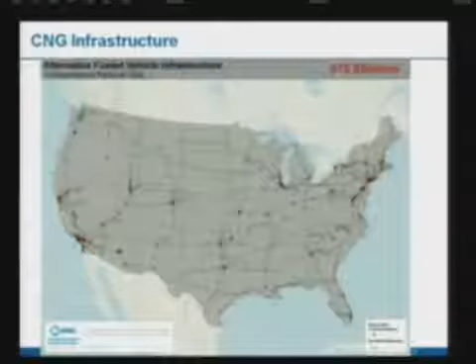This is a bit difficult to see, but here's a map of the compressed natural gas infrastructure out there. They have 870 stations, and most of them have a fleet based around them, so they can be kind of self-sustaining. They're starting to cluster together so fleets can go from one station to another, forming various corridors, like you can see in California and up in the New York area.

As far as the refueling infrastructure goes, the major cost drivers are based on how many compressors you need—that's the most expensive part of the refueling infrastructure. Your compression requirements are driven by two things: how much fuel you're running through the station on a regular basis, and how quickly you need that fuel pushed out.

If you need a lot of fuel but not very quickly, you can compress it and then store it, having it available as vehicles come in. But if you need it really quickly, you need a lot of compression capacity, which is very expensive.

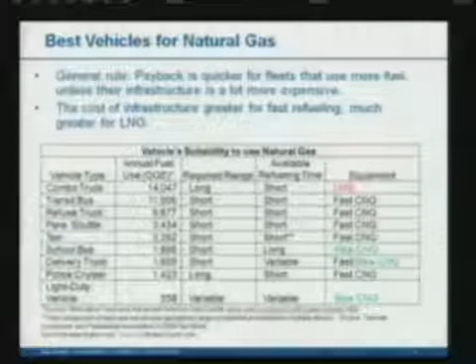And then you want to look at the available refueling time. If they're a fleet that all comes into the station at once, it has a long refuel or a short refueling time, which makes the stations more expensive. So those two columns dictate what equipment you're looking at. For the combo truck, you probably need liquefied natural gas, which is more expensive. For these next four, you're fine with a fast CNG station. Then when you get down into the school buses, which have a long down period, you can use a slow CNG station, which is a lot less expensive and more cost effective.

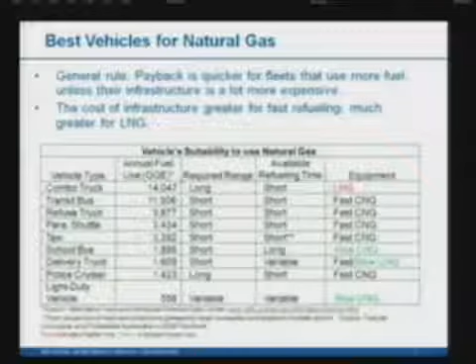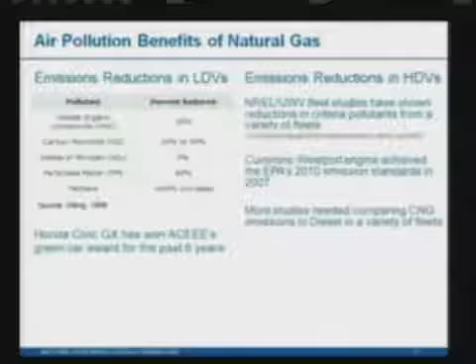Just as diesel vehicles have been striving to meet the 2010 emissions standards, Cummins Westport had an engine that had already met the 2010 emissions standards back in 2007. But we need more studies comparing the various fleets' emissions with diesel emissions as we come closer to 2010.

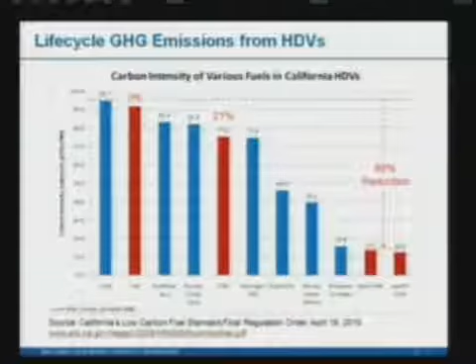Here's how greenhouse gas emissions go. I like that the California Air Resources Board has done a pretty good analysis of the life cycle greenhouse gas emissions for their low carbon fuel standards. You can see compressed natural gas reduces emissions 27% below low sulfur diesel. LNG doesn't do quite as well on their rating, partially because they assume a 10% efficiency reduction, which I'm not necessarily in agreement with. But there is an 86% reduction if you look at landfill natural gas.

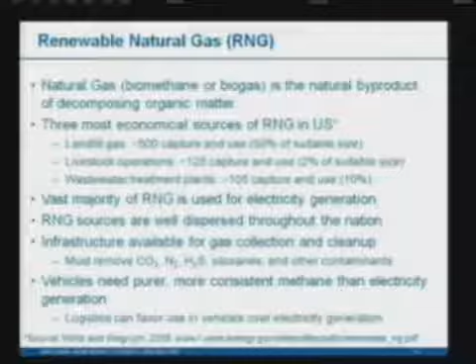The last thing I want to mention is renewable natural gas, also called biomethane or biogas. It comes primarily from landfills, from livestock operations, and from wastewater treatment plants. The vast majority of it is used for electricity generation right now, and an advantage of this energy source is that they're well dispersed throughout the nation, and we have the technology right now to clean it up to be able to use it in vehicles. And I will wrap it up with that.

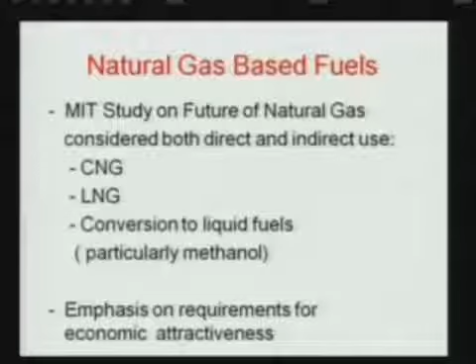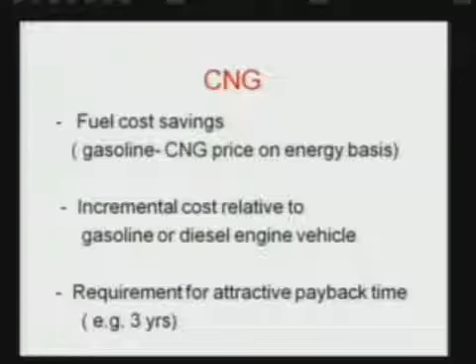Callie's talked about the economic issues involved in determining where CNG is promising as a transportation fuel. As he mentioned, you have to weigh the fuel cost savings versus the incremental cost of the vehicle relative to gasoline or diesel engine vehicles. And our view was, based on previous purchasing and use trends, that in general you would want a payback time of around 3 years for most buyers to purchase an alternative fuel vehicle.

So given that frame of reference, we made an assessment of the potential impact with particular emphasis on the near term, and by near term I mean the next couple of decades. And our conclusion is very similar to what you heard earlier. The greatest potential is for high mileage per year vehicle market segments because there the fuel savings is sufficient to pay back for the higher incremental cost. The most favorable segment from our point of view was short-range heavy-duty vehicles, and then after that high-mileage light-duty vehicles, generally fleet vehicles.

We made an estimate of the potential impact that these market segments could have on security and greenhouse gas goals, assuming 100% penetration. So assuming that you could get 100% penetration of these market segments, we concluded that you could replace a little over 1 million barrels of oil a day, which is equivalent to using around 2.5 TCF per year of natural gas.

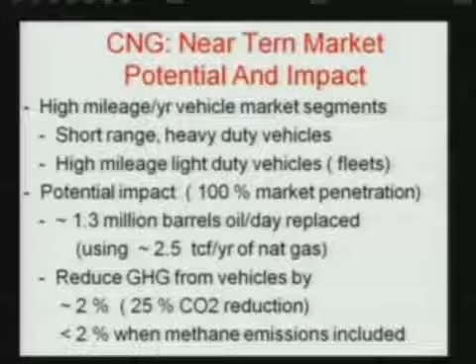Now, there is another factor that needs to be taken into account, and that's the methane emissions from the production, processing, transmission, and use of natural gas. And the EPA has recently increased its estimate of methane emissions from natural gas systems. And when you take that into account from a systems point of view, it can have a significant impact on the greenhouse gas benefits from all natural gas-based fuels. So in this case, the greenhouse gas benefit would be less than 2%.

Now, what about LNG for long-haul trucks? LNG has the advantage, as Callie mentioned, of having a high energy density and is thus suitable for long-haul applications. It does face a number of challenges. One is the high incremental cost. Even with short payback time, high incremental cost can be a concern for purchasers of trucks.

There's also the challenge of the operational limitations of using a super cold fuel. This fuel is at minus 162 degrees C. It has to be stored in a special thermos bottle, and you can only keep it at the cold temperature for a limited period of time. It has to be used in less than a week. And there is concern about the predictability of the thermal containment of the fuel.

Another challenge is the infrastructure requirement. It's expensive, and the potential users, the American Trucking Association, have expressed concern as to whether you would have a competitive fueling structure for their truckers if the trucks were to be used on the highway and have to use filling stations on highways. So this assurance of price competition between fuel suppliers is a practical

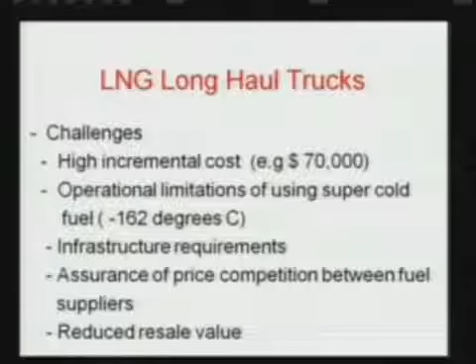consideration of some significance. Another challenge is the possibility of a reduced resale value for LNG trucks, because a significant number of long-haul trucks are sold internationally after they're used. And then the question arises, what would be their resale value if the country to which they're sold does not have an LNG

infrastructure? Now, these challenges that I mentioned can be mitigated if the LNG trucks are used for long-haul applications between hubs. There, the refueling would be done by the facilities owned by the companies, and the drivers would have certainty as to what the fueling availability is. The trucks can be used in a very predictable way, and so this looks to have significantly more potential than on-highway use. And this could be a modest but significant market.

And again, just to get a frame of reference, assuming 100% penetration of this market segment, oil consumption could be reduced by around 0.4 million barrels a day, corresponding to the use of 0.8 TCF per year of natural gas. It's difficult to estimate the greenhouse gas emission benefit because it depends very much on the efficiency that's assumed for liquefaction. But a representative number is on the order of 10 to 15% greenhouse gas reduction per truck.

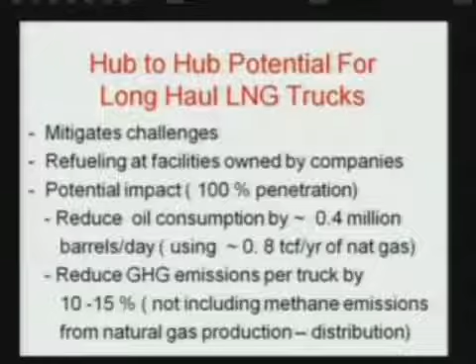Now, this, again, does not include the methane emissions from natural gas production, processing, transmission, and distribution. And as I mentioned earlier, this number has gone up, and so this can have a significant impact on the degree of greenhouse gas reductions.

Now, let me turn to conversion of natural gas into a liquid fuel. And there's significant motivation for this. If you could convert natural gas into an economically attractive liquid fuel that you could use like gasoline or diesel, your barriers provided by high incremental cost and the need for a completely new infrastructure would be removed. Natural gas conversion into liquid fuels has been done for a long time. The uses, though, have not been for transportation. It's been mainly for chemical production.

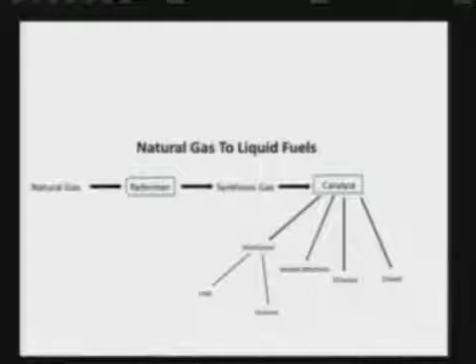And the way it works is the natural gas goes into a unit called a reformer. It produces what's called a synthesis gas, which is hydrogen and CO. That synthesis gas is converted by a catalyst to various types of liquid fuels. And you have a wide range of fuels you can produce, going all the way from diesel to ethanol, mixed alcohols, and then the smallest molecule you can produce is methanol. And methanol itself can be used as a feedstock for producing gasoline and DME, dimethyl ether, which is a clean burning fuel for diesel vehicles.

Now, of all these liquid fuels, methanol is the fuel that's best established. It's made in large quantities. 13 billion gallons are produced per year. It's used for the chemical industry. And it's the one that's made most efficiently. It's about 67% efficient in its conversion.

Now, if you were to take the natural gas in the U.S. and deploy the current technology, it would be possible to produce methanol at a cost of around $1.30 per gasoline gallon equivalent. That's taking natural gas at $4 per million BTU. So that's essentially $1 per gallon less than gasoline on an energy basis. And even if the natural gas price were to go up to $6 a million BTU, methanol could be produced at a significantly lower cost than gasoline is produced now.

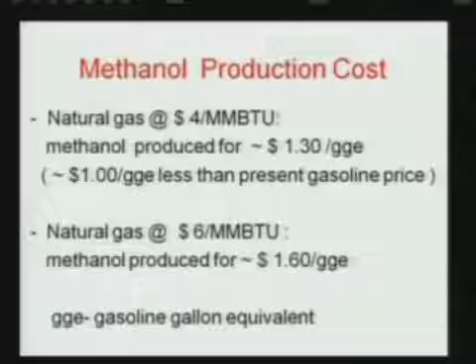Gasoline right now is produced at a cost of around $2.30 per gasoline gallon equivalent. So this is a very important aspect, that it's possible to produce a liquid fuel that could replace gasoline and diesel that actually costs less.

Now, there are two ways that methanol can be used. One is in light-duty vehicles, in flex fuel vehicles, which are similar to the ethanol gasoline flex fuel vehicles we have now, of which there are around 6 million on the road in the U.S. The additional cost to a vehicle that has the ethanol gasoline capability would be on the order of $100 to $200. So the incremental cost would be minimal. And in addition, the driver would potentially have a fuel cost saving. Now, there is legislation being considered to mandate that light-duty vehicles be capable of operating on ethanol, methanol, and gasoline.

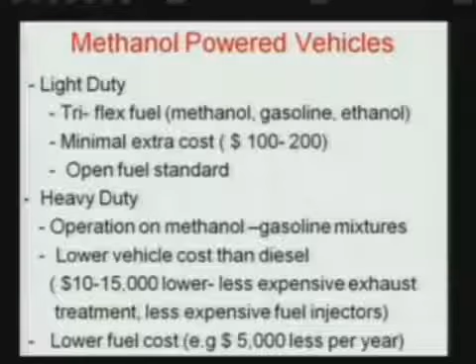The other option is a heavy-duty vehicle, where the vehicle could be operated on methanol and gasoline mixtures, flex fuel, and there would be two economic benefits. One is the vehicle cost would in fact be lower than diesel, not higher, and the reason is that these vehicles would use spark ignition engines, which have low-cost exhaust treatment systems and low-cost fuel injectors. So there could be a $10,000 to $15,000 saving, and there could also be a lower fuel cost saving. So there's significant potential economic benefit.

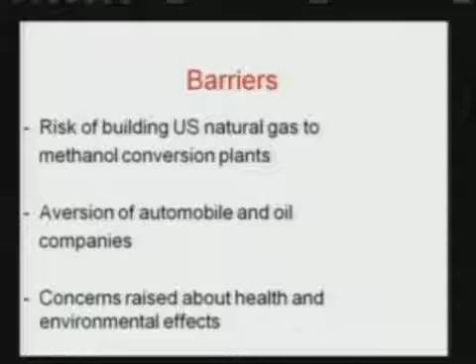There are barriers, the risk in building natural gas to methanol plants. Another barrier is there are not too many people who like this fuel. The oil and automobile companies are not enthusiastic about it, and concerns have been raised about health and environmental effects.

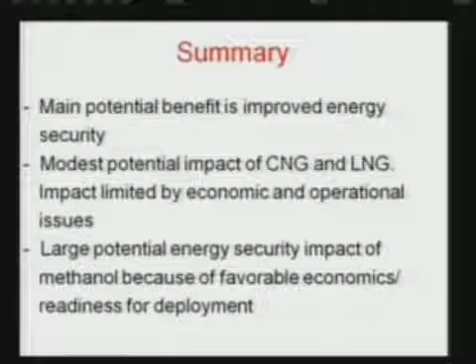So to sum up, our conclusion is the main benefit from natural gas-based fuels is improved energy security, not a greenhouse gas benefit. There's a modest potential impact of CNG and LNG in terms of reducing our oil use, and this impact is limited by economic and operational issues. With regard to methanol, there is a large potential energy security impact because of its favorable economics and readiness for deployment. However, as I mentioned, there are significant barriers to its deployment. Thank you.

Thank you very much, Dan. And we're going to switch gears a little bit, but we're going to come back to all these issues both in our panel discussion and when we get to Stephen. And Dana Aunkst from the Pennsylvania Department of Environmental Protection got slipped in just before we started, so I didn't get to plug him for his bio information, but he's held a couple of different titles because we've changed it a few times on the program, and I guess now you're actually the acting director of DEP. So why don't you maybe provide us a little background and talk about something that's gotten a lot of hype, water resource issues and shale gas development and fracking and whatnot. And I was really fortunate to find Dana, and really thank you for coming down to try and shed a little light on what's been a very emotional issue for some folks.

Thank you. Thanks very much, Jan. Yes, on Monday I started a new gig, so I am currently the acting deputy secretary for field operations for the Department of Environmental Protection in Pennsylvania. Field operations is essentially what it says. It's out and doing all programs in the field offices. So I'm having to get up to speed very quickly.

But as most of you probably are aware, one of the big potential opportunities for new natural gas development in the country is shale gas, and we'll hear more detail on that next. But one of the challenges that it poses to Pennsylvania is we have what's called the Marcellus Shale Formation that underlays about 2/3 of our state. It is a huge economic opportunity for the Commonwealth, because most of this geologic formation underlies areas that have been, over the last 25 to 30 years, hit particularly hard by the move to the Sun Belt and are otherwise known as the Rust Belt. So a lot of these older towns and cities in north central, northwest, and southwestern Pennsylvania see this as a very, very huge opportunity, as does the Commonwealth as a whole.

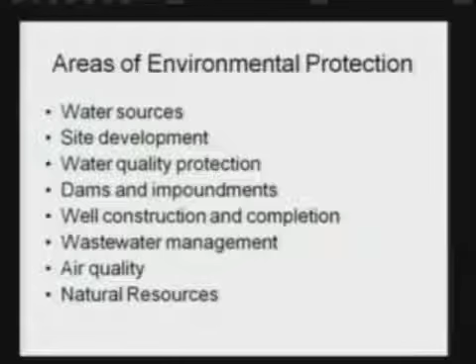And when we first became aware that this was going to be such a huge play, a huge economic opportunity, the first thing we had to do was find out how many areas of environmental protection this whole operation, the development of these wells and the infrastructure necessary to deliver the gas to market, was going to affect. And this gives you an idea of all of the areas of environmental protection that we currently interact with regard to this play. And I'll go through each one of these.

First, water sources. Each one of these wells, when they're drilled and hydraulically fractured, because of the technique, the depth, and the horizontal drilling, can take up to 5 million gallons of water to hydraulically fracture. Generally, we're told it varies from 3 million to 5 million, but it can be up to 5 million. And when the industry first moved into Pennsylvania, we are a very water-rich state. We have the second most miles of streams of any state in the country, Alaska being first. 86,000 miles of streams in Pennsylvania.

It was looked at as an abundant source, and we were never going to have to worry about the quantity available. Unfortunately, they came into Pennsylvania in the springtime when the snow melts and it rains, and so the streams that they saw flowing very healthily in the springtime don't always flow that way in the summertime.

Much of the water, when it's used in a hydraulic fracturing operation, is what we call consumptively lost, meaning it's contaminated to a point where it has to be disposed. In a lot of cases, the common practice was deep well underground injection control wells. So it's consumptively lost. How much water will be needed? We need to get projections of that because we need to figure out whether or not we have that available flow in our streams and lakes.

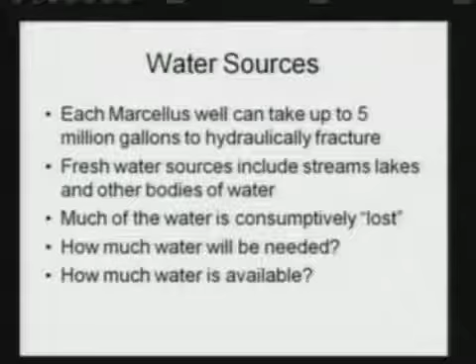The good news is we're starting to get data back after a couple years in this business, and we're finding out in the Susquehanna River Basin, which has a separate federal compact, the Susquehanna River Basin Commission, that oversees water consumptive loss, that the daily consumption is no greater than one of our power plants that essentially evaporates steam through cooling towers. So on the grand scheme, it's not as big an issue as it may have originally been thought. But we've only been at this a couple of years, and the industry hasn't completely ramped up yet.

So water sources was an issue. Site development: these pads where they construct the wells, generally a good-sized pad, maybe 6 to 8 acres, and then they'll drill multiple wells off these pads. So we have these well pads being constructed in the northern part of the state, the north-central, northwestern part of the state, that are primarily forest or even a lot in agriculture as well.

So we have concerns about erosion and sediment coming off these construction sites, and then post-construction stormwater. What type of post-construction site characteristics are going to be left on the landscape, and are you increasing stormwater runoff there by increasing erosion in your streams as well?

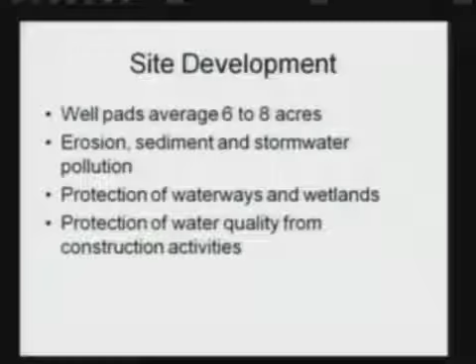We also had to consider the protection of our waterways and our wetlands. A lot of wetlands, given the number of streams we have, and we don't want construction on these well sites impacting or destroying wetlands. So that's another big issue we had to get our hands around.

And then finally, protection of the water quality. Construction of roads, pipeline facilities, and the well pads themselves has the potential to impact the stream in terms of erosion and sediment, but we have stream crossings where the roads have to cross streams, pipes have to cross streams, so we're very concerned about that. Site development issues were also a big concern for us.

Well construction and completion, and what we consider completion includes what everyone knows as hydraulic fracturing, or for short, fracking. So in constructing the well, we have to make sure we have proper regulation in place requiring well casing that meets certain standards to prevent gas migration.

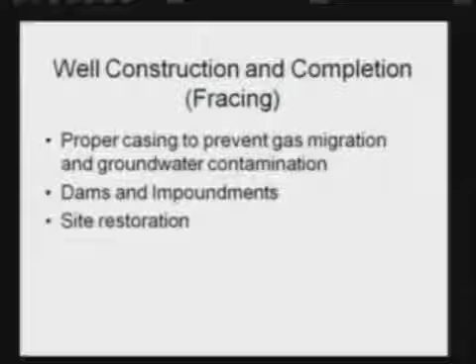One of the issues we're chasing right now in some areas: Pennsylvania's been an oil and gas state for 135 years plus. The first oil well in the country was outside of Oil City, near Titusville. We've had natural gas in our energy infrastructure for many years. We have naturally occurring natural gas in shallow formations, and a lot of times when these wells get started, they hit these shallow pockets unknowingly, and we end up with gas migration. So proper drilling, construction, and casing requirements needed to be developed, and we recently enacted new regulations in that area.

A lot of these activities involve the construction of dams or large impoundments, because what the industry has gone to now, over concern with the amount of available water, is to recycle and reuse a lot of the water.

They've figured out a way to recycle and reuse water so they don't have to use as much fresh water. But that involves construction of large impoundments where they manage these flows, fresh water in, hydraulic flowback water in, to mix for another frac job on the same well pad for a different well. So we had to get our arms around the construction of dams and impoundments.

And then finally, site restoration, and this gets back to post-construction stormwater, but it also gets back to issues related to deforestation, and I'll get into that a little bit later.

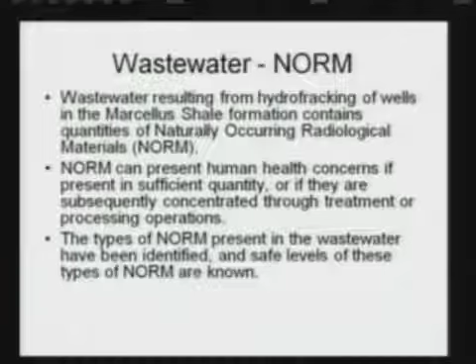So the wastewater, when it comes back out of the wells after the well's been fractured, can pick up quantities of this NORM. It can, at certain levels, present some health concerns, especially if it's subsequently concentrated through a treatment process, where this material is actually treated and the solids are dropped out. That can concentrate some of this NORM, and that's called TENORM, technically enhanced naturally occurring radioactive material. But nonetheless, it's naturally occurring.

And we have identified the types of NORM in this wastewater. We've done pretty extensive sampling on our own, and the industry has also provided us with a lot of data that has given us an idea what's in the wastewater and what levels these parameters are present.

We've determined right now there's no immediate hazard at these levels, but we're going to take precautionary controls. We're going to get out ahead of this. We're going to require monitoring of the wastewater. We're going to also accelerate the frequency at which downstream drinking water intakes may have to monitor their water, just to make sure, to be on the safe side, that what we're seeing now continues to be seen into the future.

The other parameter in the wastewater is total dissolved solids, and these can run very high. Again, this formation, being a shale, is an old seabed, so it's essentially loaded with salts. So when you fracture this material and put water in there to fracture it, it comes back as very, very strong salt water. So there are problems with the TDS.

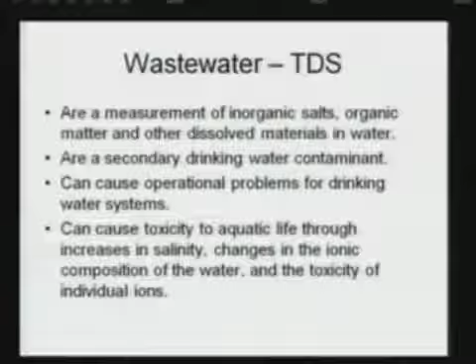They are a drinking water contaminant, albeit for what's considered secondary effects, meaning taste and odor, and they may discolor laundry or prevent your dishes from getting clean. But high TDS can also cause other operational problems at drinking water systems, such as the formation of disinfection byproducts, which some are known to be carcinogens, so we have to keep an eye on the TDS. And then finally, it can cause toxicity to aquatic life in streams if the TDS isn't managed properly.

We did an analysis that showed our rivers and streams had a very limited capacity to take additional TDS. There are a lot of legacy loads of TDS in our streams, many of which are affected by it, so we had to get out ahead of that issue as well. There was growing demand for the capacity of the streams, and we have a number of different industries in Pennsylvania, so we wanted to make sure we protected the economic development of all industries by not using up all the assimilative capacity, making it available to everyone.

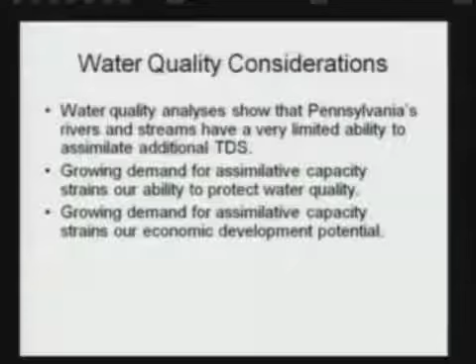We passed a new regulation last year that deals with TDS and requires this type of wastewater to be treated to a very stringent standard. Essentially, this wastewater has to meet the drinking water standard of 500 milligrams per liter before it's discharged to the stream. Now, air quality issues.

We did two studies, one in the northeast, one in the southwest part of Pennsylvania, in 2010. Both of those studies came back and found concentrations, as would be expected with the developing industry. They found concentrations of natural gas, and they found elevated methane levels in the ambient air.

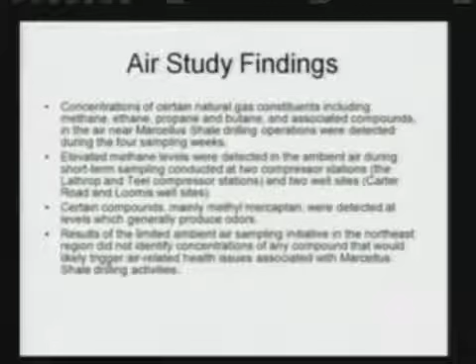But the conclusions were that they weren't levels that we needed to be concerned about yet. So that's the good news now, but again, we've got to try to stay out ahead of this. They found some other pollutants, but as I said, the good news is right now it's not something to be concerned about.

So in summary, those are the areas that this new industry touches on in Pennsylvania. Our department is addressing these as quickly and as well as we can, and we intend to continue to do so. Thanks.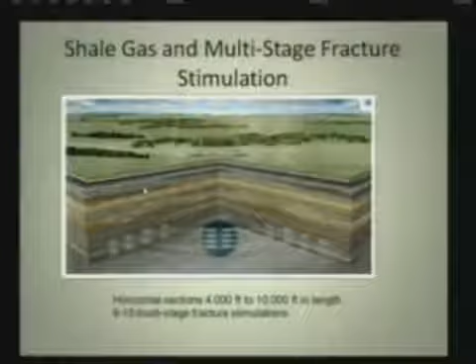What is new about shale gas? They've been drilling through shale gas formations for over a century. It's been known that they're the source of gas. They always bled gas; the cuttings that came to the surface showed that they were exuding some gas. It just wasn't recognized as a commercially producible formation. The first horizontal well was drilled in 1929, but the real commercial application of horizontal wells took off in the 1980s. Fracture stimulations have been performed since prior to 1950.

The Mitchell company started drilling vertical wells in the Barnett Shale in the 1980s. The application of horizontal wells started in the Barnett Shale in 2003, and within 2 or 3 years, many companies were competing for acreage in the area. It all of a sudden turned into the hottest play in the country.

This graph is from the EIA 2009 study. You can see that shale gas is the predominant source of growth in the overall natural gas production profile. They're currently producing about 24 TCF a year, and by 2035 that will be about 27 TCF a year, which is about a 10% growth over that 26-year time frame.

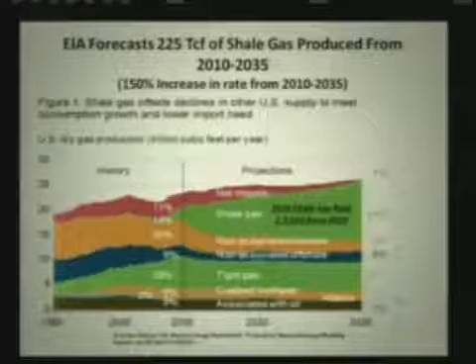Shale gas, on the other hand, is growing by 150%, and at the exit rate in that graph it's producing 45% of the overall gas. The amount of shale gas produced from 2010 to 2035 is about 225 TCF. That's a number to keep in mind, and I'll refer back to it a few times in the presentation.

Just some of the word slides. The Potential Gas Committee was developed out of, I think, the Colorado School of Mines. I don't know that much about it, but it's one of the better respected evaluations of natural gas resources in our future. It's updated about every 3 years. Their proved and probable estimate of natural gas is 441 TCF, with shale gas contributing about one-third of that.

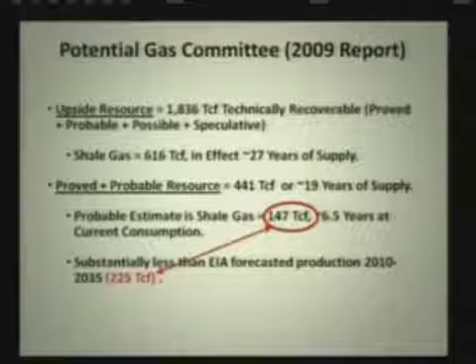That volume they estimated in 2009 is 147 TCF, which compares to about two-thirds of the 225 TCF that the EIA has in their forecast. That 2009 study had a dramatic increase in the amount of shale gas assumed, and it's very hard to see into the future, so the potential for these numbers to change in 5 or 10 years is quite substantial. That disconnect, I'm not sure, is necessarily significant.

This is a production profile or forecast of the overall shale gas contribution to natural gas supply, based on the individual plays. The reason I show this is to illustrate the impact of four key shale gas plays. The Barnett Shale is the oldest.

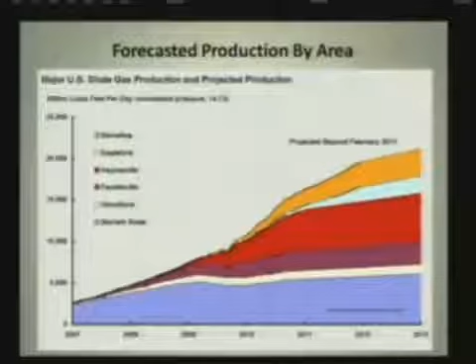The Barnett was developed with vertical wells in the 1990s, converting to horizontal wells in 2003, and with the improvement in gas prices after 2003 became the hottest shale gas play. Next in time frame is the Fayetteville in northern Arkansas, followed by the Haynesville, which is currently the most important source of growth in shale gas, potentially contributing about one-third of the overall shale gas profile. Then there's the Marcellus, which is currently rapidly growing, and because of its large areal extent has the potential to be a very important source.

This is collaborative work with Art Berman, looking at publicly available data. This public data has monthly production volumes for each of the wells, or many of the wells, in the plays, and they're searchable, so we can identify which production horizon they come from, when they were drilled, and who operates the wells. After looking at several thousand wells in the Barnett, Art and I estimate that the ultimate recovery of the wells is about 1.2 to 1.3 BCF per well, whereas most operator investor presentations support say 2 to 2.5 BCF.

In the Fayetteville, we found very similar results: 1.2 BCF versus the 2 to 2.5 BCF claimed. In the Haynesville, we're seeing 2.5 BCF average per well. It's much more problematic to estimate ultimate recovery there because there's less data, and the wellhead flowing pressures are changing, with the public data not providing much information on how those surface flowing pressures change. So there's certainly more uncertainty in that estimate. But we do see a core area of 4.6 to 4.8 BCF per well, and the main operator in that core reports 10 BCF per well.

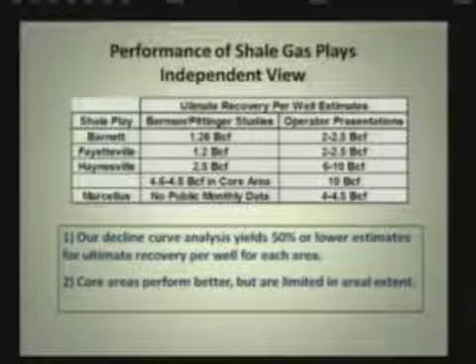For the Marcellus, unfortunately, the state does not require publication of monthly production data. They do provide cumulative production on a 6-month basis, and I'll show one graph on that. So we don't have particular conclusions on the Marcellus, but many operators support a 4 to 4.5 BCF per well estimate.

In summary, the two main points of the presentation are: our decline curve analysis tends to lead us to estimate the recovery of these wells at about 50% or lower than what is generally discussed in investor presentations. And, just as important, the core areas where wells are performing better are quite limited in extent—say 10 to 20% of the overall area of the plays.

So I just want to go through quickly each of the key plays we're talking about.

The Barnett data is substantial. We have 40, 50 months of data in some of the older wells, and we're seeing fairly established decline trends. This curve shows the group average curves, representing about 450 wells with fairly established decline trends. We're seeing a weighted average recovery of 1.2 to 1.3 BCF per well, based on the average including the database.

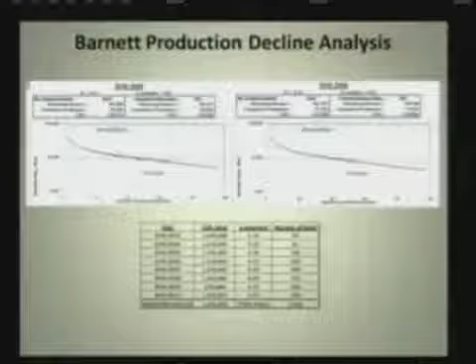That's 2,300 wells in that database. Fayetteville shows 1.2 BCF per well for 2,000 wells. Once again, there's a lot of data with fairly regular late-time trends where we've got 20 to 30 months of data following a fairly established pattern. So it leads us to be fairly confident in these two trends.

The Haynesville is much more difficult. It's a much higher pressure formation, actually initially at lithostatic pressure, which means the gas is holding the fractures open at these initial conditions. Because of this extremely high pressure, and these being deep formations, the initial rates are very, very high.

But the decline rates are also very, very high, and we don't have as much data for this trend. We also see very large flowing pressure and surface pressure changes, so it's much more challenging to evaluate. But our estimates are about 2.5 BCF per well overall, with a core area of about 4.6 to 4.8 BCF, roughly half of the operator claims.

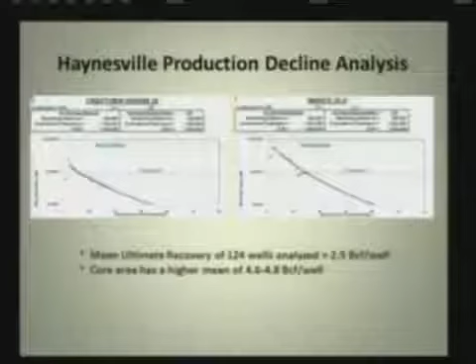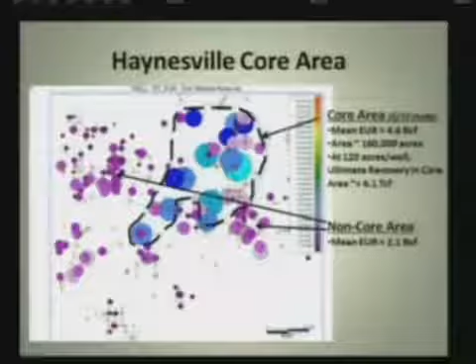Now if we take that 160,000 acres and assume an eventual development spacing between 80 acres per well and 160 acres per well, say 120 acre average spacing per well, that gives us 6.1 TCF out of the Haynesville core area. The Haynesville is about a third of the shale gas, and shale gas is expected in the EIA estimate to produce 225 TCF over that 25-year time frame.

So I think the extent of these core areas in these plays is very important.

Are these wells going to continually flatten and stabilize and produce over a 40, 50, 60-year time frame, or will they continue to decline at similar rates as now and have a well life of about 10 to 15 years? Based on our work observing the Barnett shale and Fayetteville wells, we think we are not going to see as much flattening as is assumed by the operators.

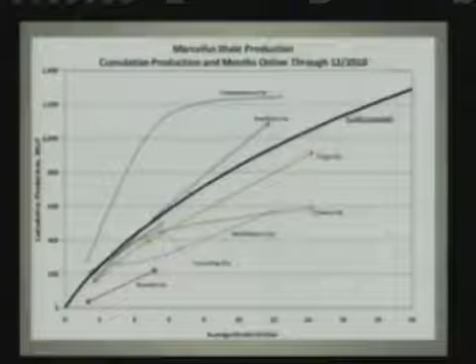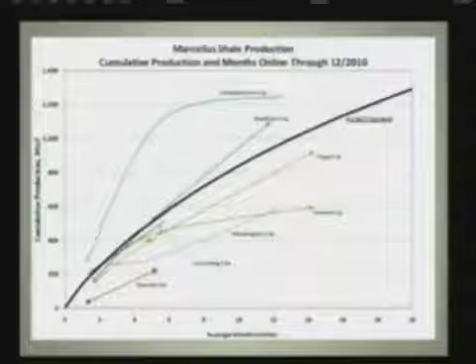Quickly, the data for the Marcellus play is in a different format, so it's hard to analyze like monthly production data. But we see a couple of counties outperforming. Susquehanna County is doing very well compared to the average 4.2 BCF type well supported by operators.

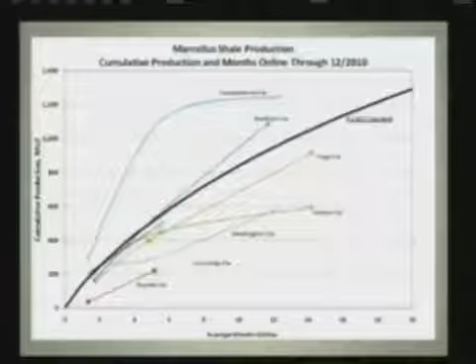Bradford County is also doing well. But there's a lot of activity in Washington and Greene County, and the data from those wells is underperforming the curve by a substantial fraction.

Typically, one well per 640 acres is needed to hold the acreage, and much of the recent drilling rate has been aimed at holding acreage.

The natural gas companies are also in a growth story, and I think they're selling their shares of stock more on the momentum of a growth story rather than the overall chance of commerciality of running their business.

The write-downs of the 5 key shale gas players totaled $37 billion in 2008 and 2009. Capital investment to drill these wells is typically about 150 to 300% of cash flow from these companies. So the result is you have natural gas selling at a historically low discount to oil, and there's a lot more activity drilling these wells than perhaps on a long-term basis can be justified.

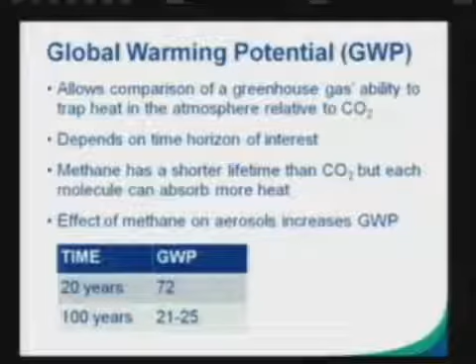This really matters because, broadly, if we put too much potent greenhouse gas in the atmosphere, we can lose the short-term battle because we are so heating up the atmosphere in the short term, even though we're on the trajectory to lower it later. So time matters. We can't just think about the 100-year global warming potential; we've got to think about the interim steps. So we're using 20 years as the context.

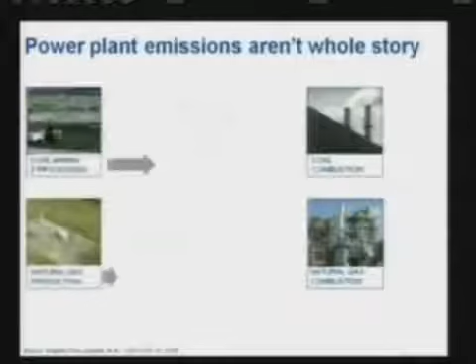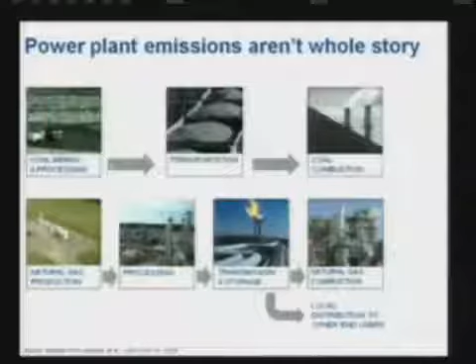I'm going to use a different comparison, coal combustion and natural gas combustion, because there's better data about that. We can think about the supply chain that Daniel referred to and the greenhouse gas emissions across that supply chain. As Daniel talked about, they looked at that in the MIT study. You can quantify that, and these are some estimates we have recently put together. Again, this is not the case before us, but it gives context, and the data is far stronger here.

But even in this case, we do not have good error estimates. We do not have uncertainties around those two numbers on the right, and that's really what we need, because with the uncertainties, those are actually overlapping numbers. We cannot differentiate between them. That doesn't mean they aren't different, but the data quality is not sufficient.

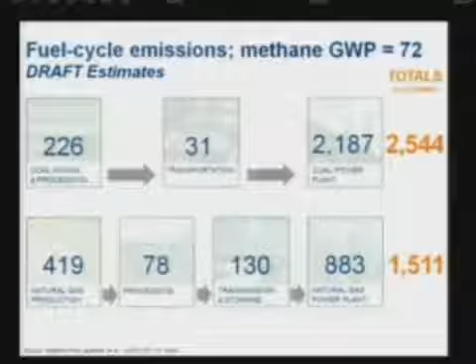And this is the theme, one of the key points that I want to bring out that's relevant to the issue before us today as well: we really are lacking in good quantitative data on natural gas leak rates throughout the processing, transportation, and use of natural gas. So that creates a lot of uncertainty in the global warming potential implications of using natural gas. And these numbers, by the way, are with a 20-year estimate.

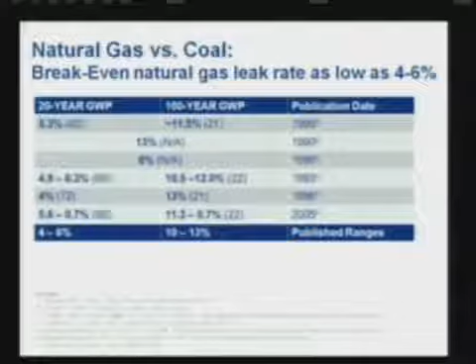So if we go and look at the literature, again, now comparing natural gas to coal, what we find is that the 20-year leak rate break-even point between those two fuels is between 4 and 6%. And the literature's got some fuzziness in it. There's even an issue in the literature now about what the appropriate global warming potential of 20 years is. There's some later data that suggests 72, which is the consensus right now, is probably too low. But we stuck with 72.

But what we care about here is if we do it to gasoline, and I should have put gasoline diesel here because it's the same, that number from 4 to 6 goes to 1 or 2%. So if you have a leak rate of 1 or 2% in the process of using it as a transportation fuel, you are going to be at the break-even point. And it's actually, in most cases, closer to the 1% than the 2%. But I put it as a range because I think that's a better representation of the uncertainty in the underlying analysis. But our data is not as strong as we'd like. There's really a lot of uncertainty here.

And if we look at the 100-year, it's 3 to 5%. Those are very low numbers because, as Daniel said, EPA has raised their estimate to 2 to 2.5% upstream leakage. So that means, based on the best available data, which still has a lot of uncertainty, there's a lot of opportunity for refining those numbers. There's also the possibility that these numbers could be underestimated. The last revision was doubling the estimate. There's some other data to suggest it might be higher than the 2 and 2.5%.

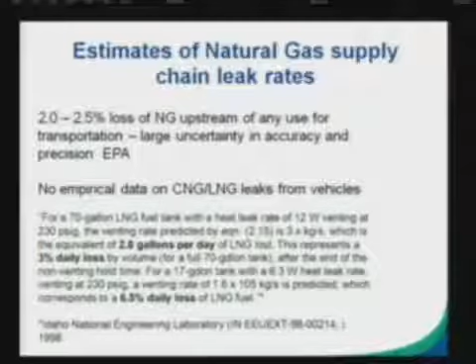So what that says, going back, is that in the 20-year time frame, a natural gas vehicle is a net increase of net radiative forcing, meaning it's a negative relative to how much impact it's having on the global climate. It's not neutral, as Daniel says, in the 20-year time frame, most likely, based on best available data. There's lots of uncertainty, and I'm stressing that carefully because we are pushing really hard. We've got to get better data to sort this out. We need more transparency with industry. We need to understand what the issues are. There is not good transparency across these data. And there are fights to even make it more transparent.

That does not even include the actual use in the transportation sector itself. So what are the leak rates in CNG and LNG vehicles? There may be some data out there. It's not very visible. The data that we can find is limited, and it suggests that those numbers are considerably higher. So if we go back again to the 100-year global warming potential, which is probably what Daniel was referring to, we're now talking about neutral. It's going to be worse based on the data that we currently have in the short term, possibly break even in the longer term, but the error bars on it are too large.

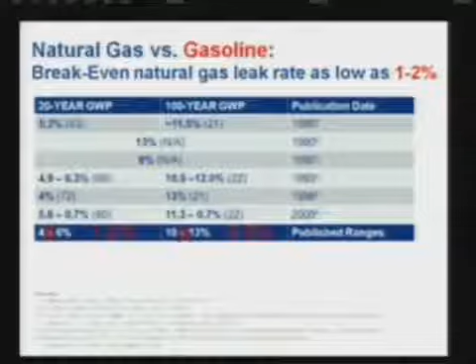We shouldn't be making public policy without better data and ensuring that we really get everyone working together, including industry, on all sides of this. Let's get the best data. Let's use the science to really answer this question, because right now there's too much uncertainty to really understand the implications. But the indications are, for a transportation fuel, based on the best data now, before we try and reduce the leak rates in the industry, we would actually be increasing net radiative forcing.

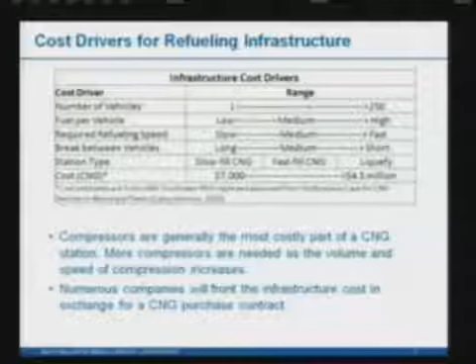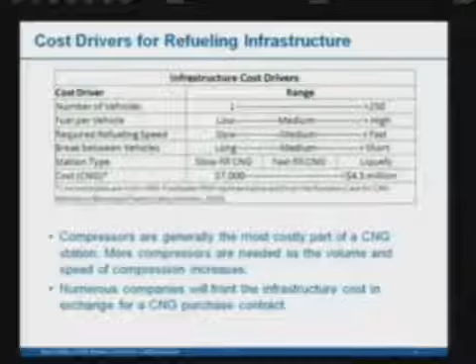And so these top two rows in the table dictate how much fuel gets pumped through the station: the number of vehicles refueling at the same station, and the amount of fuel per vehicle. And the next two, the required fueling speed and the break between vehicles, dictate how quickly you need to have that compressed natural gas available. So basically the quicker a vehicle needs to refuel, like if they're in a fleet that just doesn't have much time and has to get in and out really quick, that makes it more expensive. And if you have no breaks between the vehicles, such as an entire fleet of transit buses coming in after a day of transporting people, then you have to refuel many vehicles quickly, and it becomes more expensive.

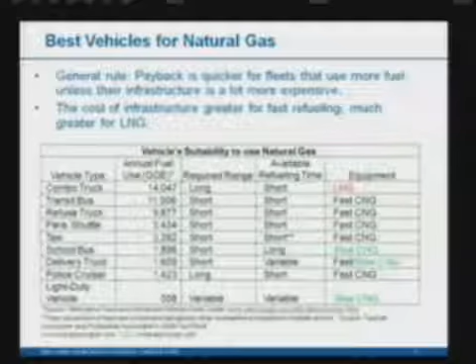And so if you sum up the past couple of slides and look for what fleets are particularly favorable to use natural gas, we start by looking at annual fuel use, because you're paying off the upfront infrastructure costs through fuel savings, by the amount that natural gas is cheaper than diesel. So the more fuel a vehicle uses, the quicker it'll pay off its infrastructure, and the more profitable it will be.

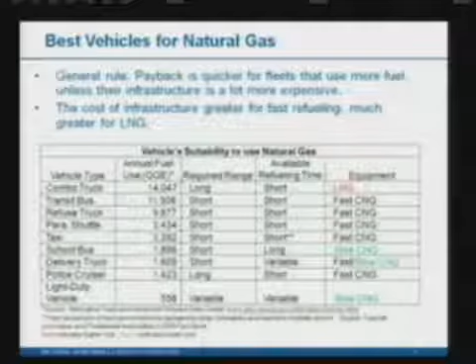You can see these vehicle types are listed from the ones that use the most fuel to the least. And the range determines basically how much fuel you need to put on the vehicle at once, if it has a long range.

Let me just walk through the overview of the presentation. We have Callie Johnson from the National Renewable Energy Laboratory, who's going to give us a broad view of the state of the market for natural gas vehicles, where the opportunities are, where the challenges are. We have Dr. Daniel Cohn from the Massachusetts Institute of Technology, who has done a lot of research on different transportation technologies, but was also the executive director of the Future of Natural Gas study that MIT did, and they looked hard at natural gas as a transportation fuel.

We're pleased to have Dana Aunkst, chief of water standards and facility regulation with the Pennsylvania Department of Environmental Protection. When we're talking about natural gas as a supply, we have to look at the whole supply chain. So we are going to try to address this, understanding it's a big issue where we could have briefings on each piece, but we'll look at the supply side and the environmental concerns on the ground, and I think the Pennsylvania perspective will be very interesting.

We're also pleased to have Lynn Pittenger, a consulting engineer who does a lot of work on unconventional, especially shale gas evaluations, looking at the real prospects and challenges for meeting our long-term natural gas supply. And finally, we'll have Steven Hamburg, chief scientist for the Environmental Defense Fund, who has a broad background on climate and energy issues, but will be looking in particular at some of the greenhouse gas implications.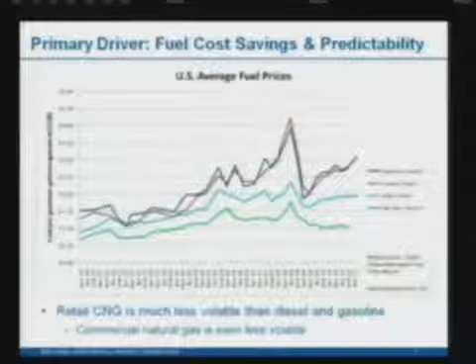Another major advantage of natural gas in vehicles is its consistency. You can see those top two lines are gasoline and diesel, very volatile. As a matter of fact, right now we're up above $3.50 for gasoline and up around $4 per gallon for diesel, which would even accentuate that volatility even more.

That is a major hurdle for businesses to plan this unpredictable cost, because for most of the fleets and companies in the transport business, this is their main cost, and that unpredictability makes it very tough to plan for operations.

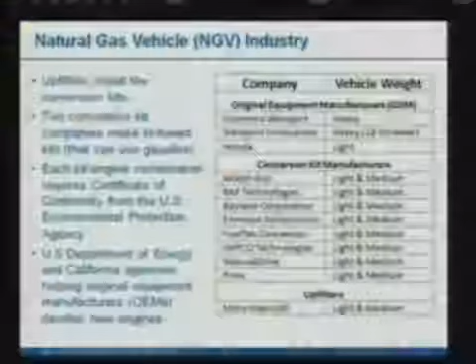To understand the economics of natural gas vehicles, let's first look at how the industry is configured. It's very unique, different from all other vehicle industries in that we have three major players. There are the original equipment manufacturers: the top two produce heavy-duty engines, and Honda produces a Civic dedicated to natural gas.

Then you have conversion kit manufacturers that make kits so you can convert gasoline engines to use natural gas, and these kits require upfitters to put the kit on various vehicles. Two of these conversion kit manufacturers make bi-fueled vehicles that can use both gasoline and compressed natural gas.

Each kit-engine combination, whenever you put one of these kits on a specific engine, requires a certificate of conformity from the Environmental Protection Agency that basically says it meets emission standards, but that also kind of limits the number of vehicles being offered as a CNG version. And then there were a couple of other heavy-duty manufacturers that dropped out in the early 2000s.